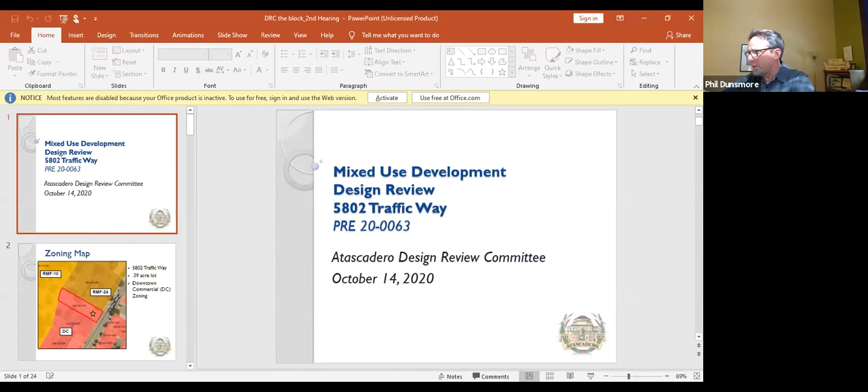As you mentioned, it is our second look at this project in the downtown commercial zone. It is a mixed-use project. To help narrow the focus for the Design Review Committee, what we're looking at is actually an allowed use in our downtown, so our comments really are related to architecture and design. It's important to keep that in mind. They're not asking for height exceptions, coverage exceptions, or setback exceptions. But if we change the building to push them into those exceptions, it becomes a discretionary project, and that's the fine line to dance around that we don't want to cross. In this case, I think Mariah is going to share how the applicant has responded to our comments received last time from the neighborhood and the DRC. I'll also be available in addition to Mariah to help answer questions, and let's see how it goes.

All right, thank you Phil. Just double checking, can everyone see my screen?

So as mentioned, this is a mixed-use development that you saw about a month ago at 5802 Traffic Way. The permit is PRE 20-0063. Looking at the zoning map, you can see the property is in the downtown commercial zoning district, with high density multifamily to the north and medium density to the west.

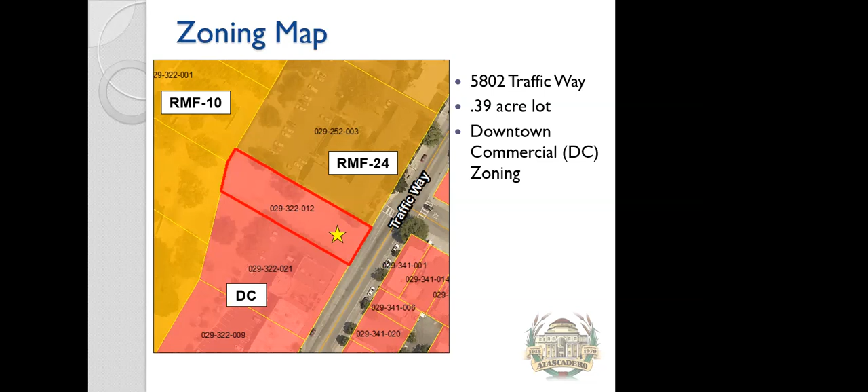The property itself is just about 0.4 acres. As we can see from the aerial photo, it is just a vacant lot without very much vegetation on it.

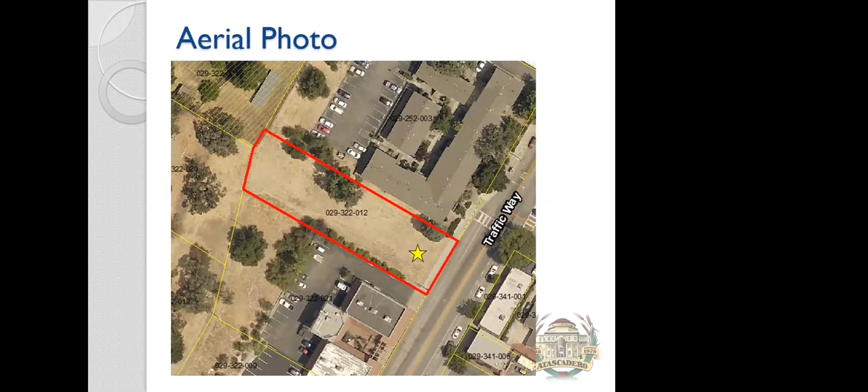The project was presented to the DRC on September 9th, 2020, and the Design Review Committee made comments about the building's exterior design and materials, the parking, the visibility for vehicles exiting the site, as well as the project's impacts on the surrounding residential properties.

As a refresher, the project being proposed is a new 3-story mixed-use building with commercial space on the first floor, about 1,100 square feet, and 10 residential units between the second and third floors, just under 7,400 square feet. The space also includes a bike storage/utility space, about 1,000 square feet. The applicant is requesting a density bonus of 1 unit for having 1 affordable unit in the project.

As mentioned before, the applicant did revise the plan to meet the Design Review Committee's comments. Some ways this was done: removing the cedar siding and instead adding a brick veneer, which includes decorative recesses and banding, in addition to smooth stucco, which we'll see in just a second.

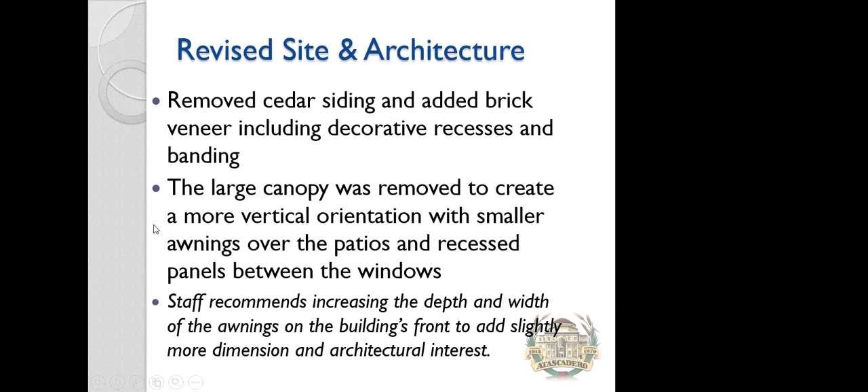There was also a large canopy over the front of the building. This was removed to create a more vertical orientation of the building with smaller awnings over the patios and recessed panels between the windows. Staff is recommending increasing the size of these awnings.

To address more of the design review committee's comments, the applicant recessed and widened the commercial storefront and residential lobby, which creates a 7-foot deep area for outdoor seating, something the design review committee mentioned they would like to see.

The applicant also improved visibility for cars exiting the site by pulling back a portion of the building - 6 linear feet of building, pulled back 3 feet off of Traffic Way - to increase the sight distance triangle, so it's easier to pull out of the parking lot.

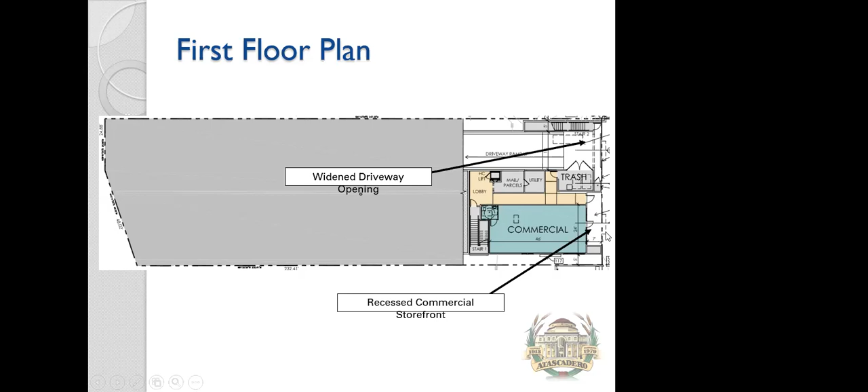The materials have not changed too much from the first time we saw this, aside from the cedar siding - now we have that brick veneer - and a paint color was added, a medium gray between the buildings, or between the windows, which we'll see on the elevations in just a second. But we still have the metal trim as well as the accents and the bronze aluminum doors and windows throughout the site.

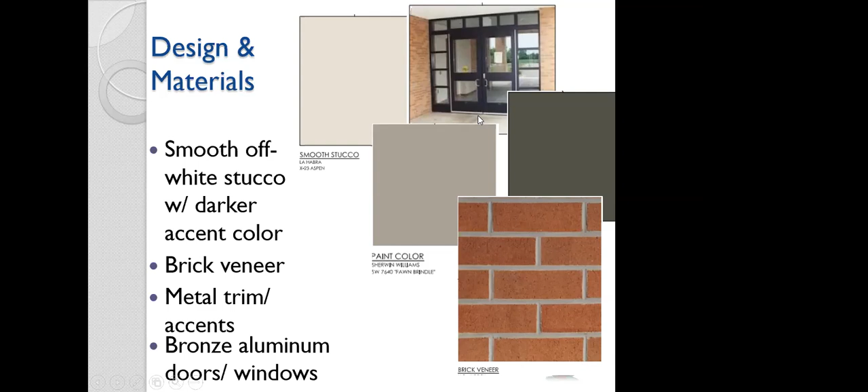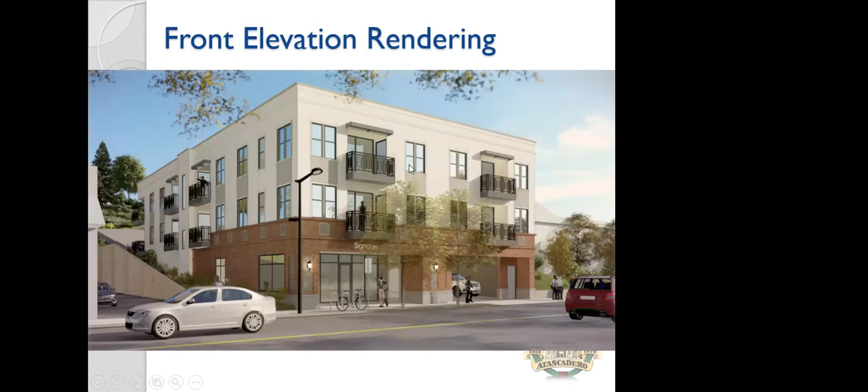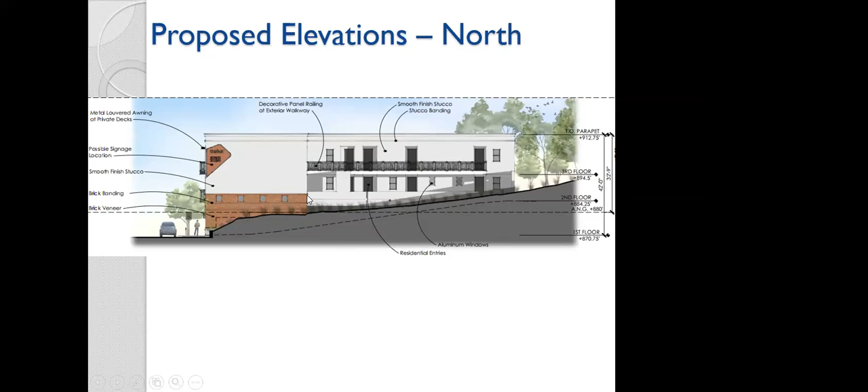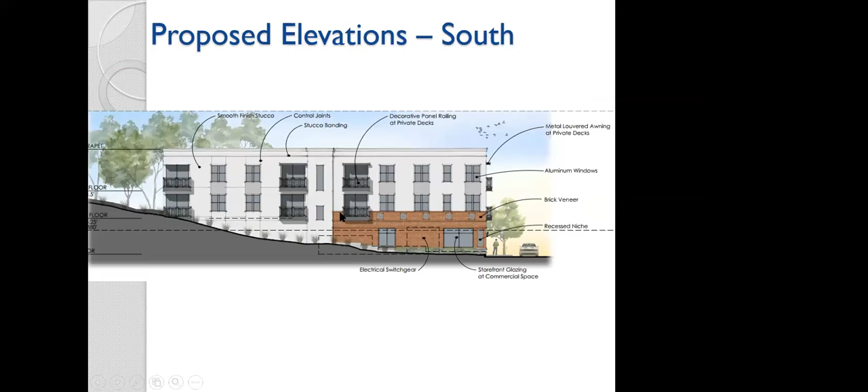From the north side, from that high density multifamily project side, you can see that the brick extends about a third of the way back on the building, and then the rest of the building is stucco. This is the rear side of the building, the west side. And then the south side, this is facing the little commercial development on traffic way right now. You can see again that the brick extends about a third of the way back on the building and the rest of it's stucco.

To discuss parking, there is no parking requirement for commercial developments in the downtown commercial zoning district. The municipal code requires 1.5 parking spaces for one-bedroom units and one guest space for every five units. So per our code, they would need 17 spaces. However, since the project is at least 10% affordable, the state specifically allows the applicant to request reduced parking ratios, stating the city shall not exceed a required parking ratio greater than one on-site parking space per one-bedroom unit. So the applicant is proposing 10 units and 10 parking spaces.

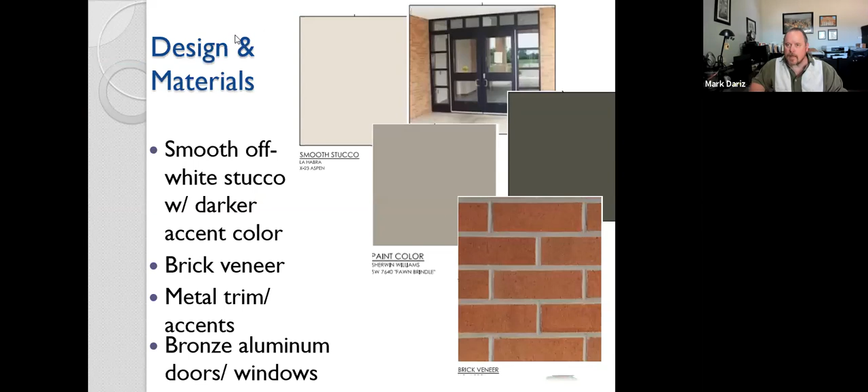I do have a question, for Phil, on the parking. It's not the number of parking, although I am concerned about that too. The two spaces that are up against the property line on, I guess, the west side of the lot—is there a requirement for a sort of hammerhead backup turnaround? I see it being very difficult to get out. I know 24 feet is minimum for the drive aisle, but when you're that close to the edge, do you need a hammerhead? It's not mandated by our code, but it makes sense to have better turnaround space to get in and out, since it makes it easier to function in these parking lots.

We do try to put those in where we can. In this scenario, you're dealing with a site that's incredibly constrained due to slope and size. I think I mentioned in our last hearing this is the third or fourth time the project's been tried on this property, so fitting this in without losing spaces or doing significant grading is a challenge. Those last couple of spaces against the west side of the project are going to be a challenge, especially with a larger vehicle. They'll probably have to hope there's another vacant space to back into, or make a couple of different maneuvers.

It's not impossible. Our municipal code doesn't have a parking lot standard that mandates certain clearances like that. It has a 24-foot backup space requirement, and that's what's been met here. It has a width requirement and a depth requirement, but it doesn't have maneuvering requirements for those last spaces. That's completely up to the applicant whether they want to fit that in, and sometimes we encourage it, but it's not mandated by the code.

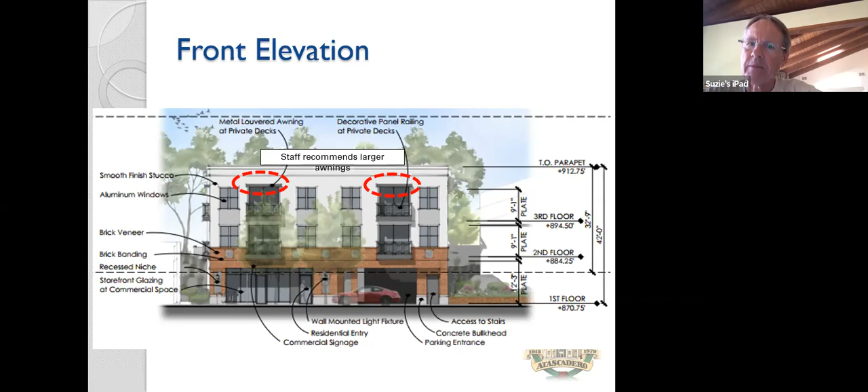Okay, no, I just was, and I guess one other thing, I know we got an email concerning the building blocking window view from the apartment next door. But this building starts right at the very sidewalk and then goes back. How does it overlap the apartment buildings in the back very much, or I don't know, that's kind of an odd question about the site plan we were looking at earlier.

Oh, that one doesn't show it, I think I might have cut it off on the site plan. To help answer that question, the building in the front, it goes back about - can you see me drawing? Yep. Actually, I'm sorry, that's not very good, okay, I'm going to undo that.

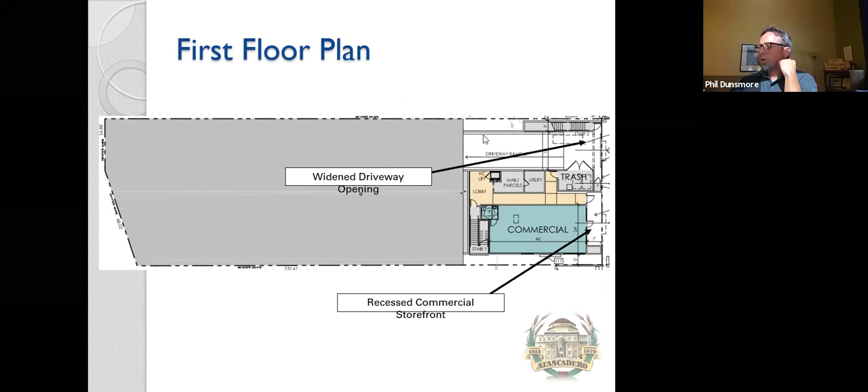99% of the apartment building faces the driveway and parking area, not the building wall. So the thing to know on this building is it's an L-shaped building. The adjacent apartment building is towards the rear and faces the parking area and driveway, not a building wall, so it doesn't actually block the sunlight or the window views from the apartment building. I think it's pretty close to what's drawing there on the screen - the majority of that apartment building is facing open air. A very small corner of the front faces towards that side at the front there.

Yeah, I was looking on the satellite photos and that kind of looked that way to me too, but I just wanted to bring it up so we could clarify it. So that sounds good. Yeah, that was one of my questions, whether or not there were any windows that looked into the adjacent property, but you've already answered that. Was there any changes in the square footage or number of bedrooms in the revisions?

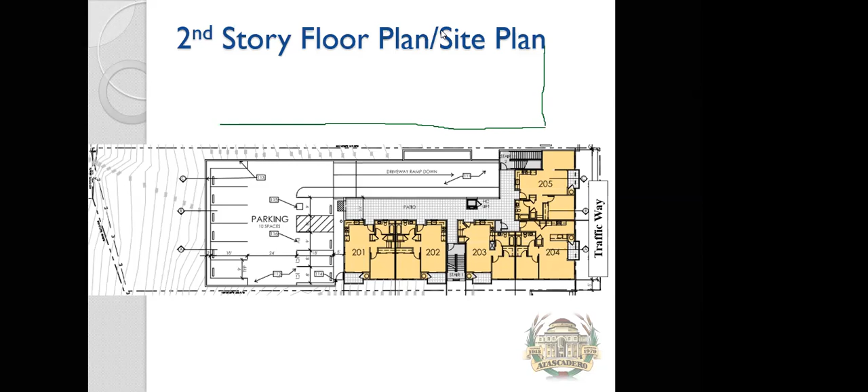No, so the units all stayed the same. So when we reduced the front area for the commercial space, they would have had to reduce the space on the unit sizes, is that correct? No, so the commercial space was just on the first floor there. So they pushed the building back, they just allowed some more area? Correct, just recessed the commercial storefront area. Okay, okay, that explains that.

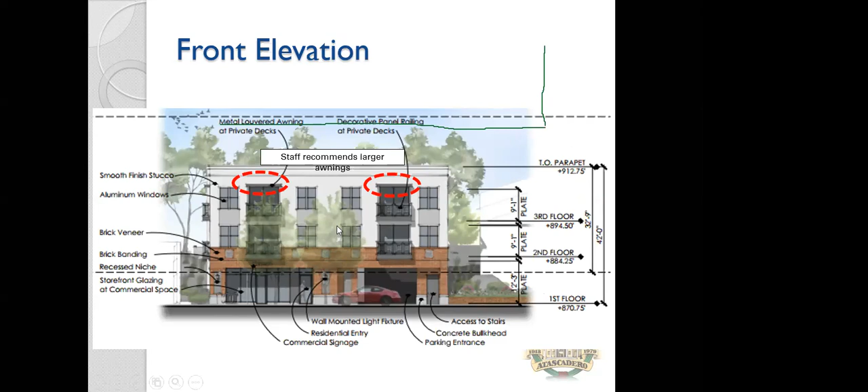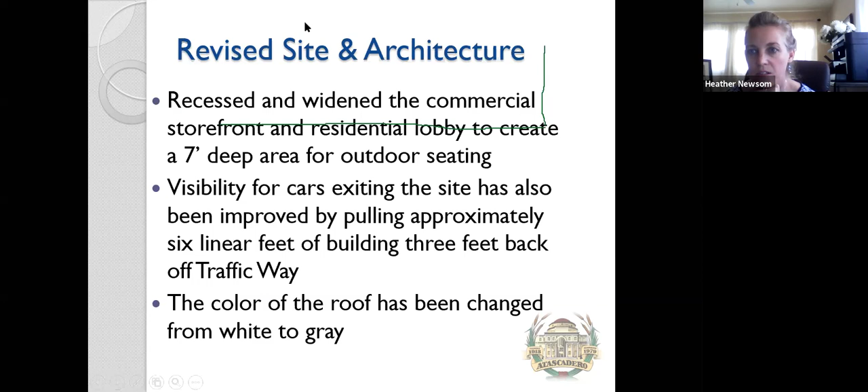I don't have any more questions for staff. Do we want to let the applicant speak or give a presentation? Yeah, Tom Jess is here, and he does have a presentation, so let me go ahead and pull that up. Okay, thank you, I'm just going to stop sharing for a moment.

Heather, I do have 2 letters at some point that will need to be read into the record as well. Do you want to give it after the applicant's presentation, or before so he can address some of those questions in his presentation? Whatever you'd like. Since we're just trying to get it loaded, we can go ahead and read those into the record.

The first one is from Gina Sirocco. She says the new facade is an improvement over the original submission. However, I still have several concerns. Number 1, safety: the new setback on the driveway still is a safety hazard. There is still a blind spot. Tenants will have to pull out into the sidewalk to see and turn. I fear pedestrians will be hit before the driver even sees them. Number 2, safety: no change has been made to upstairs access and height of the 2nd floor over the parking ramp. Moving furniture in and out will be difficult. Moving vans will have to park on the traffic way. Large items will have to be carried up the parking ramp, then the switchback stairwell. Number 3, safety: is there a rear entrance to the retail space for fire exit? This would also be needed to bring in merchandise. Number 4, safety: have they addressed lighting in the parking lot?

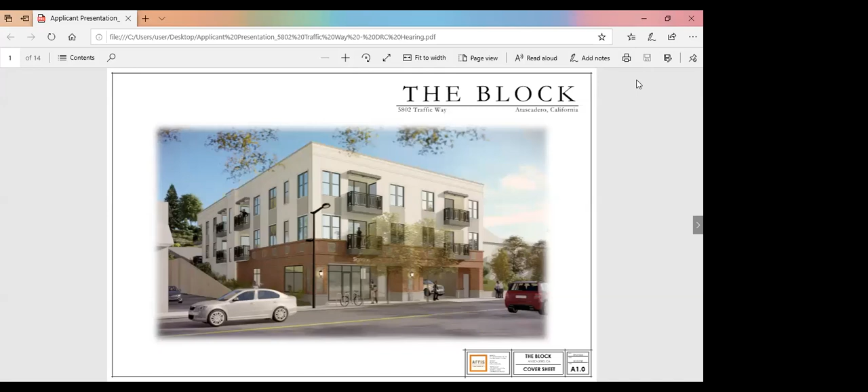The second email is from Tony Boykin. It says: as a renter whose apartment bedroom and bathroom borders the construction, I am saddened by the fact that a 3-story construction project will block sunlight, airflow, interior privacy, and my ability to view the skyline and night skies. The environmental impact of dust, dirt, equipment, exhausts, and noise associated with construction cannot be adequately mitigated by water dousings and time permits between 7 a.m. and 9 p.m. As one of 8 apartments directly affected by the construction, 5 residents, including myself, have disabilities and cannot escape these impacts. Because I am not able to move at this time, your consideration and stringent protective measures are requested. And that's it.

Thank you. I usually hold public comment until after the presentations, but since this is the second draft, I wanted to have the applicant have time to address it in his presentation.

Okay, this is Tom Jess. Are we ready for the presentation? Yes, go ahead. Can you all see the screen? Yes, yes, yes. Okay, great.

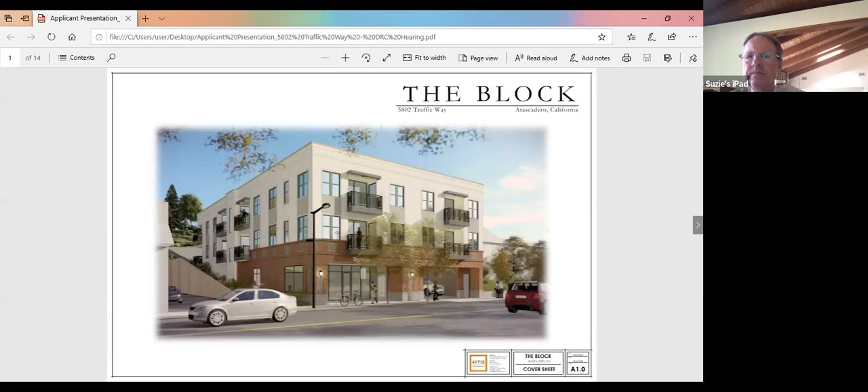Well, first off, thank you for having me back to present the project. I appreciate it. The feedback that we received at the first DRC hearing was taken to heart. We've made several changes to the building as a result of that. So the presentation that I have before you, I don't want to duplicate a lot of what Mariah said, but I did think some graphics might help explain what those changes were. So we just put together a few graphics to help explain that. Can you go to the next slide, please?

So the comment was that the wood siding on the exterior wasn't very well received, and the request was to change it to stucco and/or brick on the exterior. So we did just that. We removed the wood siding and replaced it.

We removed the wood siding and replaced it with brick and stucco. So here's a little juxtaposition of the previous and the proposed.

You can see the elevation at the bottom was the previous iteration, which was a little more contemporary, with simpler materials top to bottom. We did a banding across the middle to identify the base, and a large trellis type structure to identify the capital or cornice.

So we revised that. Now we've identified the ground floor with a precast concrete wainscot, a brick veneer with decorative accents at the columns, and recesses with decorative brick. We've also changed the lighting to make it less contemporary and more traditional. At the bottom of the windows we've demarcated the base and then went to the shaft of the building above. We've also reconfigured the windows, which were previously one large window mulled together.

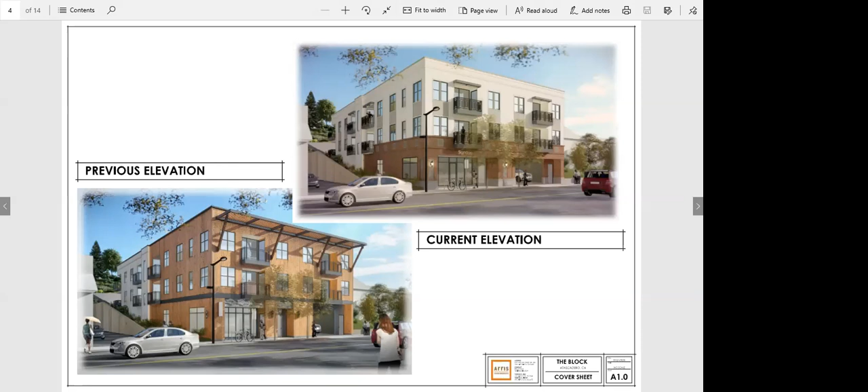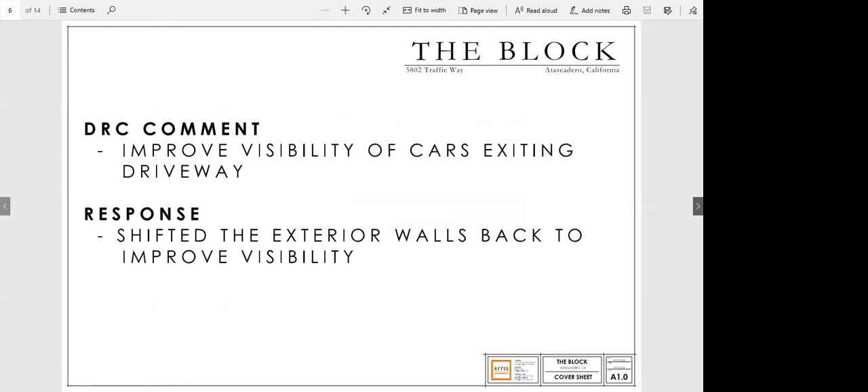One of them was to improve the visibility of cars exiting the driveway. What we did is shift the exterior walls back on the sides. We did not increase the width of the driveway at all—it's 18 feet wide and we kept it 18 feet wide. But we pulled the building back on each side to improve the visibility.

Here's a graphic illustration of the improved visibility. On the left is the previous iteration—you can see the trash projected out from the driveway. Note the driveway itself is quite a bit further back from the sidewalk, about 14 or 16 feet back from the face of curb, and a full 10 feet back from the curb cut.

On the right, you can see we pulled the trash back toward the building a couple feet, about 3 feet, and created a fire riser closet, pulling that away from the building. So we significantly increased the visibility for people exiting the driveway compared to before.

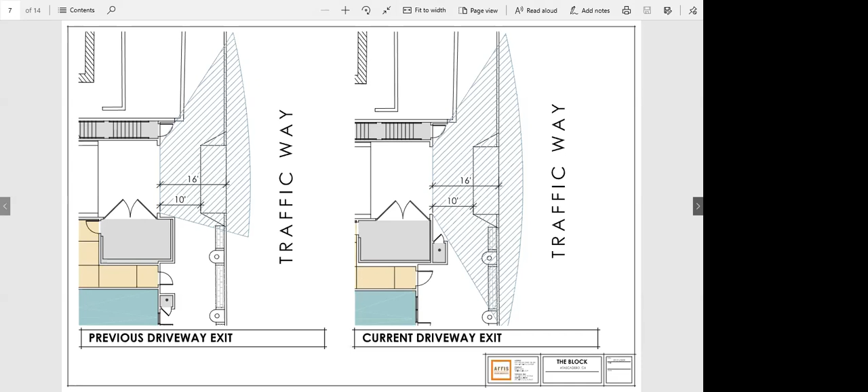Another change was to set back the entry to create an opportunity for outdoor dining at the commercial space. We pulled it back 3 feet and widened the recess an additional 10 feet to create that opportunity for outdoor dining.

Here's another diagram. We used to have the fire riser closet acting as a visual column on the elevation to separate the residential and commercial entries. We've slid that up to where the trash is, as I showed in the last one.

We've also pulled the retail back, losing about 50 to 60 square feet, but it was a like-for-like exchange of outdoor space for indoor space. We did not decrease the width or make any other changes to the commercial space other than pulling it back to create that outdoor space, which was requested by the DRC.

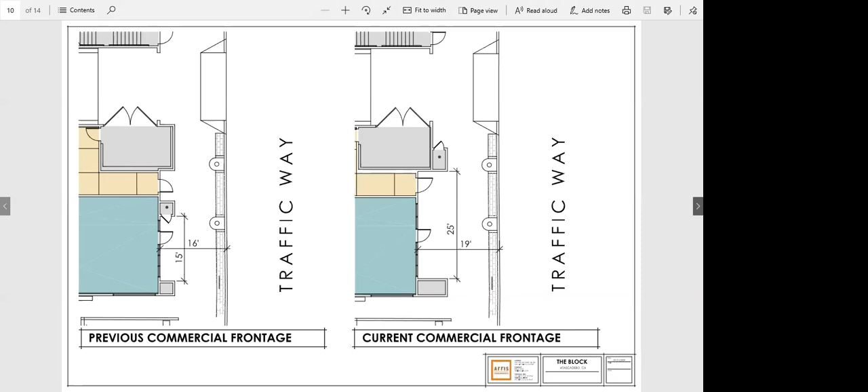And then this is a real simple one. The neighbors, and just for reference, their lot is roughly 67 feet above our lot at the street level. So they're up quite a ways. And one of their concerns was these trees that were planted at the back of the lot. So go ahead and next slide.

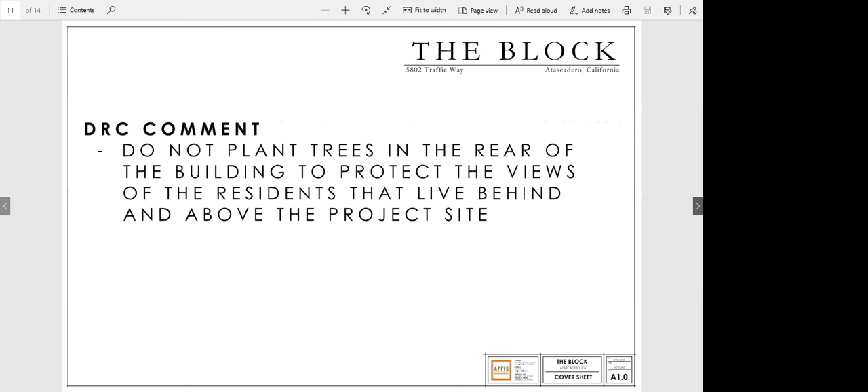So we went ahead and removed the trees and replaced it with shrubs and bushes as we said we would at the DRC. You can see that in the next slide. On the left, we had the 5 trees that we were proposing to plant back there. That wasn't well received, so we replaced it with landscaping that's lower in height so that it won't have any opportunity to block any of their views. Next slide, please.

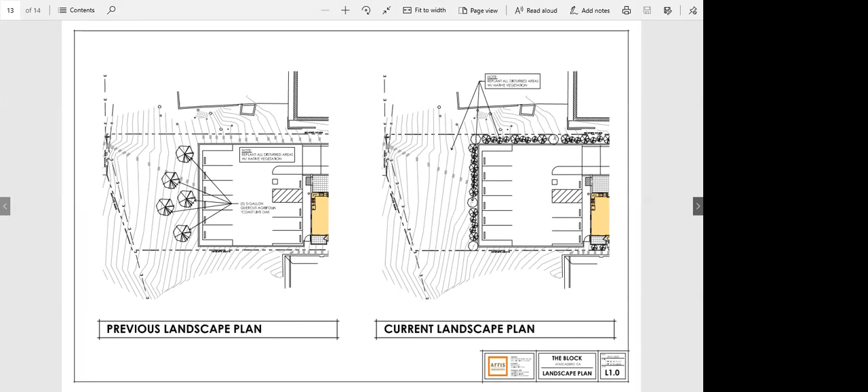I think that kind of wraps up our presentation in terms of responses to the DRC items. There were a few items that were in the letters that I'd go ahead and address right now since those were read in prior to our presentation. The one having to do Tom?

Yes. I think we might, can we check to see if we have any callers on here so we can open up public comment real quick and then you can address those as well? Oh, perfect. Okay, thank you.

I believe we do have a couple neighbors that have joined us to speak. I know Greg Ravat is here. Let me see, somebody might have dropped off. But Greg, why don't you start?

Okay, can you hear me? Hello? Yes, you can hear me. Okay, sir. Back again like a bad penny.

I have Gina Sirocco here. She's a neighbor down the street as well, and she wrote the letter. But I just really quickly wanted to say that I appreciate the design review process. This is the only chance that we get to see a building in the downtown. There's no planning commission review. So this really amounts to the only public review that neighbors have. I wish the city would change that and have these projects also go to planning commission so they're a little bit better advertised. I want to say that the architect, I really appreciate what Tom's done with this.

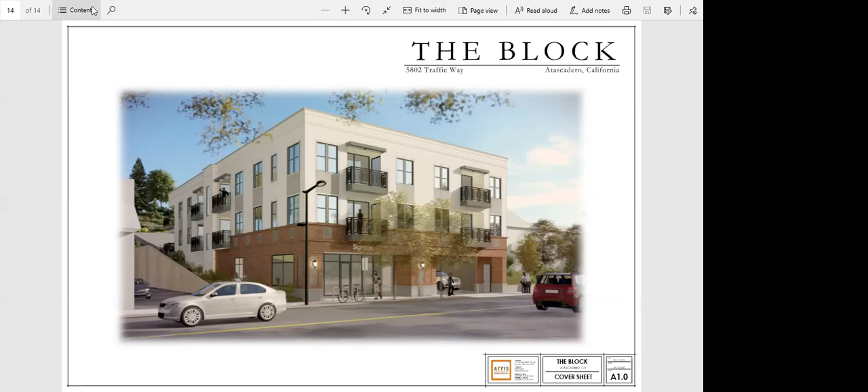Okay, thank you Tom. Phil, I just have a couple questions on the parking. I think we've got red curb there in that area, is there going to be red curb around this building? At the front, I'm not aware of a plan to require that right here. We do require that when we have exiting driveways, there is a distance requirement from that. Do you know what our public works team has said on that, Mariah?

Nick DeBar and Mike Bertuccini both looked at this and didn't mention anything about a red curb, so we'd have to probably ask specifically. I know there's one right in front of the distillery, Central Coast. Yeah, there might be one adjacent to that existing driveway.

There is a parking setback limitation for driveways that will require a small red curb. That doesn't mean it's going to eliminate all of the parking in front of this building, but there will be a distance from the edge of the driveway that you cannot park a vehicle so we can maintain that visibility triangle for vehicles pulling out of the driveway. That's the standard case with any driveway scenario. I don't have that measurement for you today on what that distance will be, but it's not going to be 100% parking along the front of that building, I can tell you that right now. There will be a visibility triangle that needs to be retained, and it will result in a loss of some parking.

Does anyone from the DRC have any comments, questions, or things for our applicant or the city?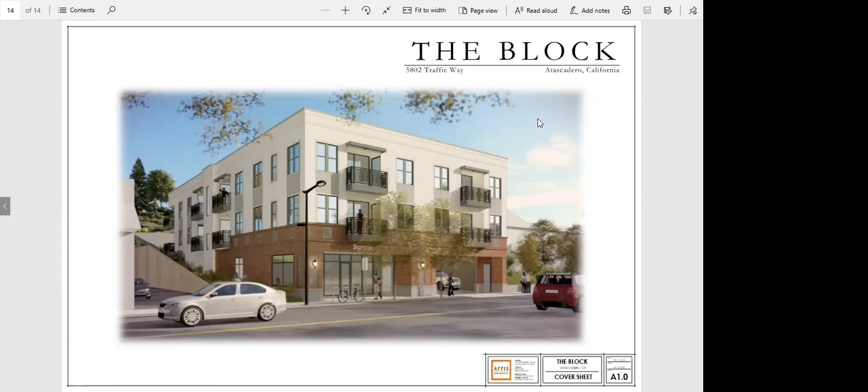Did we determine that they were just 1-bedroom units and this is an extra storage space, or what is that additional space for, Thomas? Do we have a floor plan we can put up at all, Tom or Mariah, on the screen?

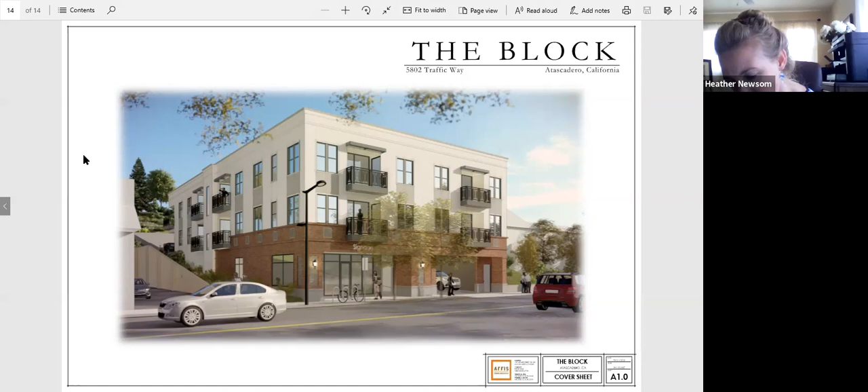If I look at the second floor plan, it looks like it's unit 204 and unit 205. It's 205 and 305, I believe. Oh, correct, 205 and 305.

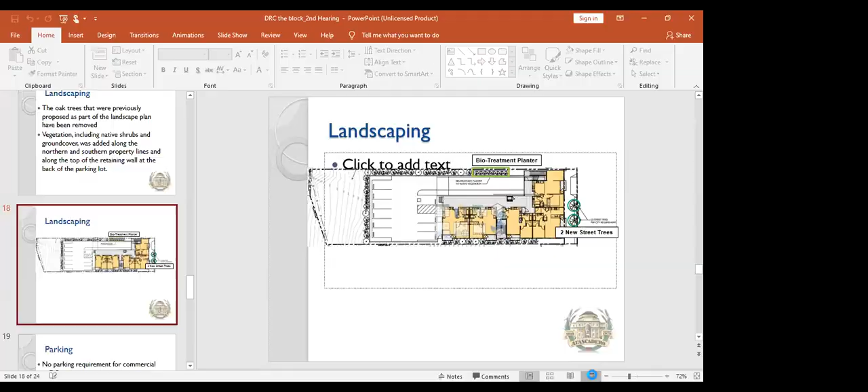So yeah, we did talk about this at the last hearing, and what we discussed and what the vision is there is that we did have some extra space there. We don't have the ability to park any additional parking spaces, so we couldn't make it another bedroom. But with the number of people working from home now, I know I have 2 people at my house working from home. Having a separate little office space or a breakout space was a really valuable asset. So we just created a little bit of privacy from the living room with a partial length wall, but the rest of the wall's open there, and that becomes an opportunity for someone to work from home at that location.

And is that nothing that a door can be put on? Is the opening larger than a door? It's much larger than a door.

And I want to comment on that, because I know the concern is it could be a bedroom, which means it could potentially cause, like Phil said, parking issues. Well, the fact is we've got 10 units and 10 parking spaces, and the likelihood of 2 people living in a 1-bedroom and each having a car might be pretty high. So you've got a potential for 20 parking space issues.

So the question that I have is, if you have 10 parking spaces for these 10 units, Phil, how can it be enforced that residents here cannot park on the street? How is that going to be handled? I mean, I see a parking issue no matter whether there's these extra bedrooms or not. There may be a parking issue, and we can't push that onto this project to be responsible for that under the purview of design review.

That's a challenge. Okay, so the other thing is, Nick DeBar just dropped in here. He wanted to chime in on the street parking issue and note that there won't be red curbing required on this project, that there will be 2 parking spaces available out front in the public right of way. But parking's a challenge. All we can do is require them to park it per code, and this is what our code allows, given the state mandate on top of that. So it puts us in a tricky situation. This may result in parking impacts in our downtown.

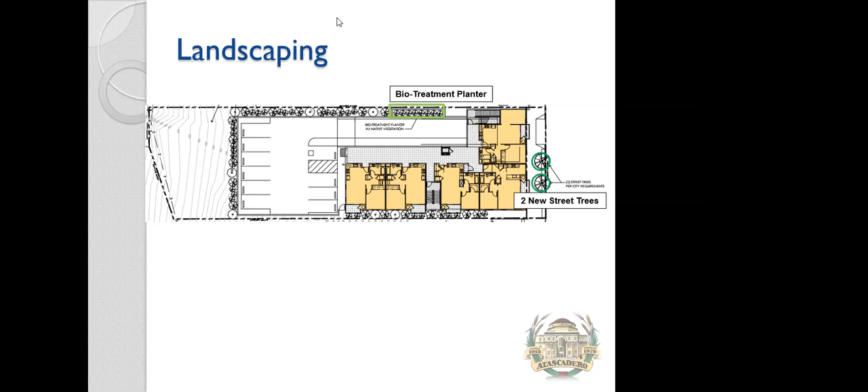Barrel Creek will come to DRC at some point. We don't have an official application from them yet, we're waiting for that. They're currently working on an application and a traffic analysis. Once they submit, we'll bring that to Design Review Committee and on through the chain of command. But at this point, we don't have an official application from them to proceed with.

Okay, and then I've been having people in the community asking me about the status of Kmart. Do we have any potential applicants or anything going in there that you know of? We don't, unfortunately. I just reached out to the owner about a week ago, and there's nothing brewing at the moment, unfortunately. He had a couple tenants lined up, then COVID happened.

Things are sort of delayed. He's working with some potential things to happen out there, but he's not in a significant rush because he's getting paid by Kmart for the lease of that large space, and there's 4 more years left on that lease. He's willing to break that with the right tenant and make it happen. He does want to redevelop that site, so we're hoping to encourage that to happen. At this point, there's nothing in the works for that site, as of today.